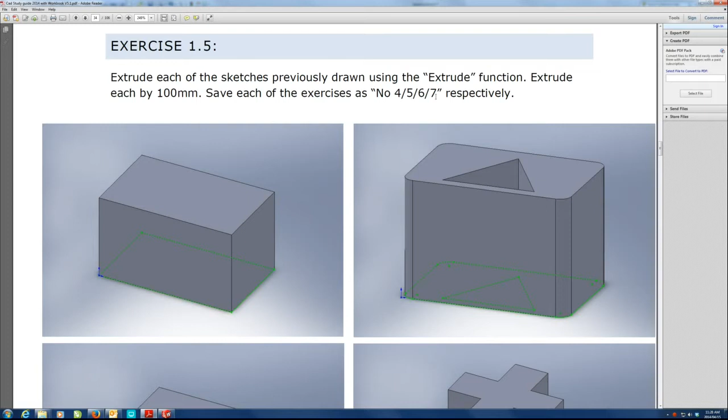In the previous video, what we did is we drew these 4 sketches, just the sketches. What we want to do now is change these sketches into 3D.

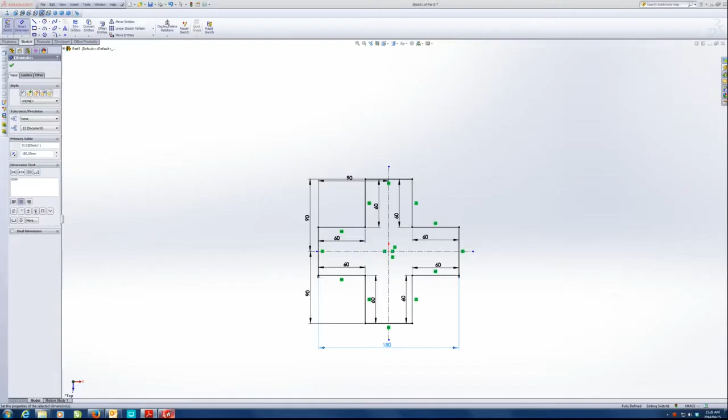Just for revision's sake, I'm going to draw this one from scratch again. We know that the sketch at the bottom was 104 by 170, so let's draw that again. I don't need to save this.

File, new part. It was on the top plane, sketch, and I drew the rectangle starting on the origin like this, giving it a dimension between this line and that line of 104, and between this line and this line of 170.

There's my square. Now it is fully defined - we have to check that it's fully defined and all my lines are black. Now we want to make this into a 3D object.

Under features, we go to extruded boss/base over there, and we can now change this from a 2-dimensional object into a 3D object.

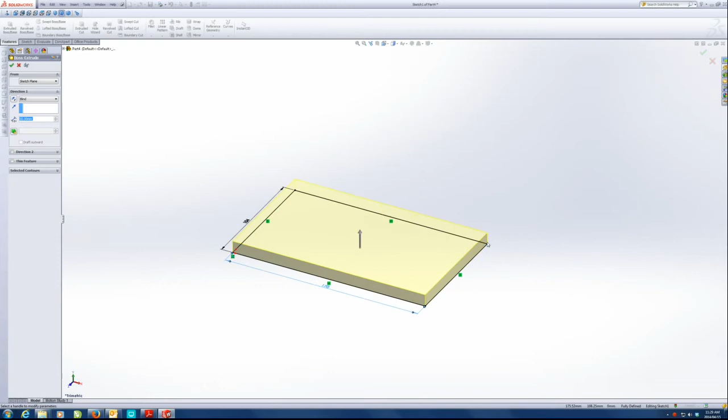There's one of 2 ways we can do this. You can either click on this handle over here, the grab handle, and make it 100 - you can see the little green number over there gets us to 100. This also allows us to change the direction up or down by clicking and dragging on that handle.

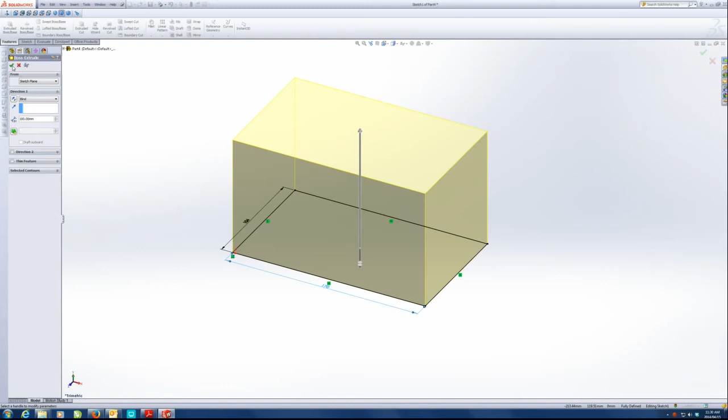The other option is to use the property manager on the left hand side. We know this must be 100, so we simply type 100 in there and press enter, and over here you can change the direction if you need to. In this case I'm happy with it going up. Now we click the tick, and there we have our block.

For exercise 1, now you're going to do the same. You're not going to redraw each of these sketches unless you didn't save them - if you didn't save them, you'll have to just redraw the sketches and extrude them. Save each of these individually - save them, you're going to need them a bit later.

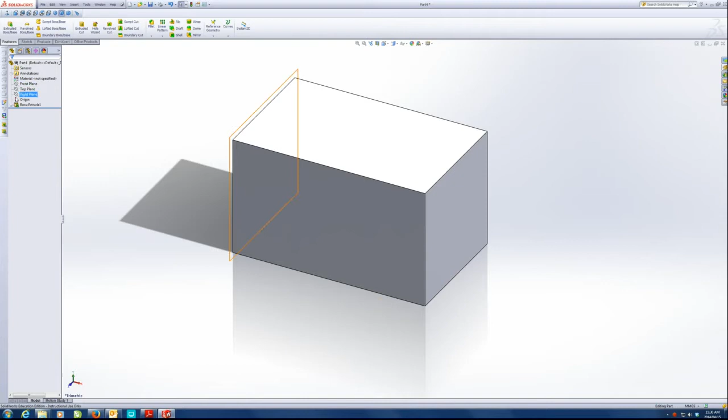By the way, this blue thing over there is the origin in each case. If you want to check where your origin is, we can just click on origin and you can see there it is in the corner - it lights up blue. Alright, let's go on with the next exercise.

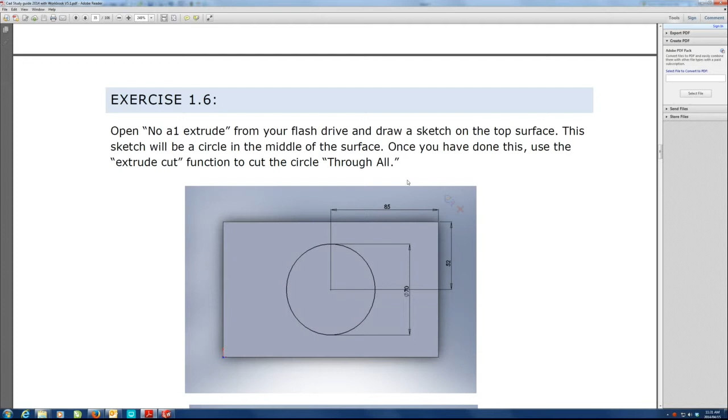The next exercise says: open number 1 extrude from your flash drive and draw a sketch on the top surface. This sketch will be a circle in the middle of the surface. Once you have done this, use the extrude cut function to cut the circle through all.

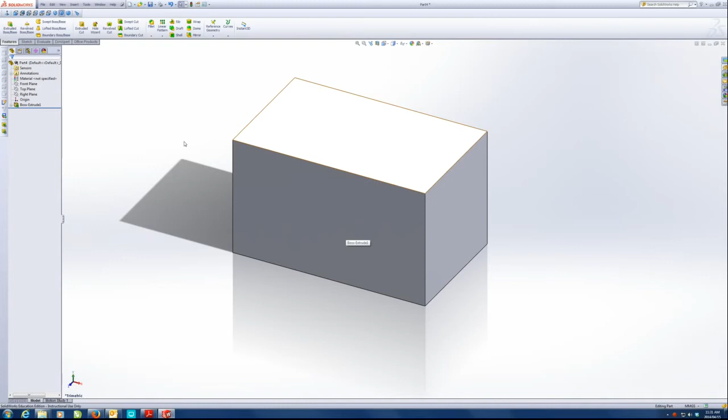What we're going to do here is draw that circle. In the past we selected a plane to draw on - we said we want to draw on the top plane and set up our sketch accordingly. But now we have a problem because there is no plane where we need to draw. The right plane is over there, top plane is at the bottom, and the front plane is ironically at the front. We want to draw on there.

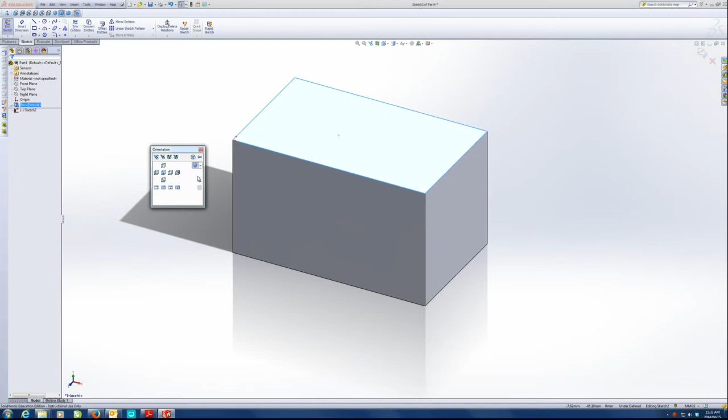So what we do is select the surface that we want to draw on and then click on sketch. Now we can draw at an angle, but it's going to be difficult to place things in the middle, so we want to view that surface directly from the top. We click on normal to, found over there in your views, or you can press spacebar and click normal to. Either way it's the same thing.

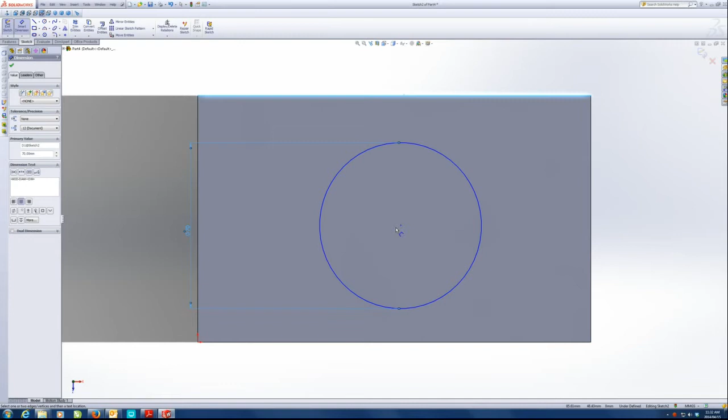Now we're going to draw a circle like this. The dimensions are 70, 52, and 85. Make the diameter of the circle 70, from this edge to this point is 52, and from this edge to that point is 85.

Now my circle is fully defined, so we can now cut it. I'm going to put this into isometric mode so you can see what's going on. We go to features, extrude cut, and select this to through all.

Now it's very important that you consider what's going on here, so let me first explain the difference. If we say blind, we can specify a depth that this hole is going to cut into this block. But in this case, we actually want it to go through all, so that it always goes through all.

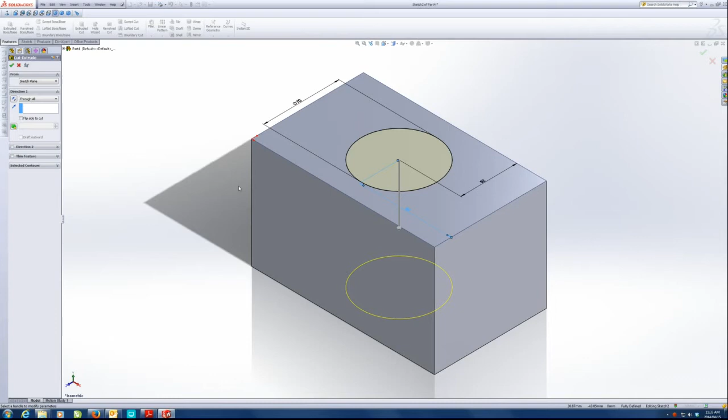This refers to something called design intent. When you're busy designing something, you need to think about the design intent: do we always want this circle to go all the way through, no matter what happens to this block? Let me show you what happens. If I go blind and make this 100, which means it does go all the way through, and I apply this, we can see this hole goes all the way through this block.

By the way, you can rotate your object on screen by clicking and holding the middle mouse button, then dragging your mouse, and that will change your view.

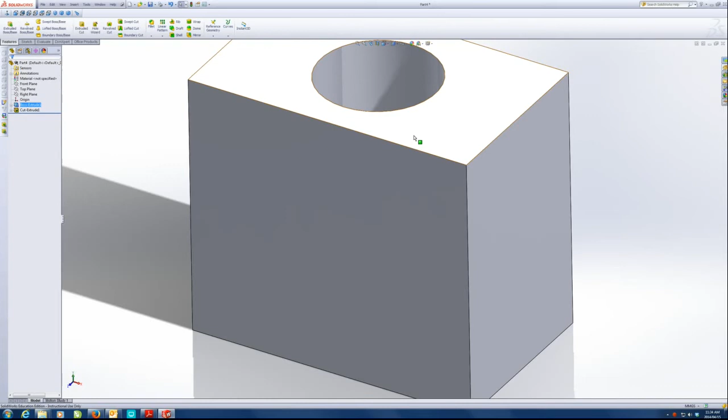Now say we decided that the height of this block wasn't enough and we needed to edit it. So we edit this and make it 150. Now what you'll find is this hole no longer goes all the way through. If we do a section view, you can see this circle does not go all the way through anymore — it only goes down to here, because we didn't select the through-all option.

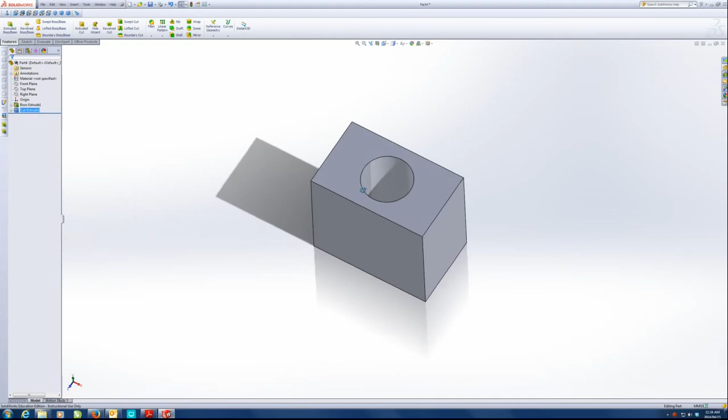Through all means that no matter what the size of this block is, this hole will always go through all. So it's not a problem, we can just come back here and change it. We right click on the cut extrude, edit feature, change this to through all, and apply. Now we have a hole that goes through all, no matter the size of the block.

For the next problem, you're going to have to round off the corners of this block. Let's have a look over here. So please save that on your flash drives. For this, we want to round off all these corners.

In the past, we used this function, the sketch fillet function. But now we're not doing a sketch fillet because we're not working in sketch mode anymore — we're working on a 3D object. So instead we use the fillet tool, found under Features.

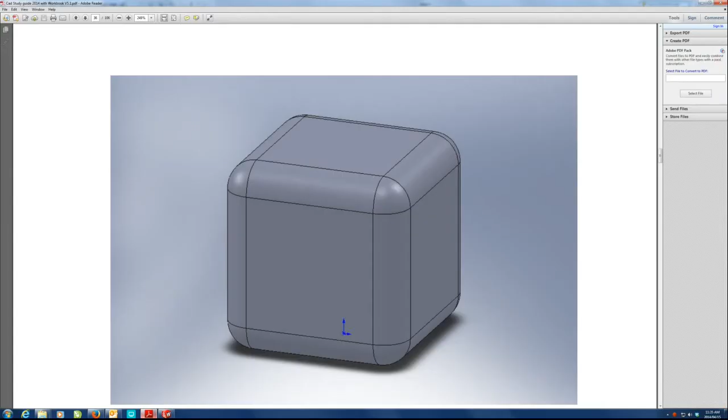There are 4 different types of fillets you can do — we'll get to them later. For now, we're just going to use the constant radius fillet. Over here we want it to be 10 millimeters — actually, in the example it's 25, let's check... okay, 20 millimeter fillet, but I was going to use 10. Oh, why not, let's use 20. So I changed this to 20.

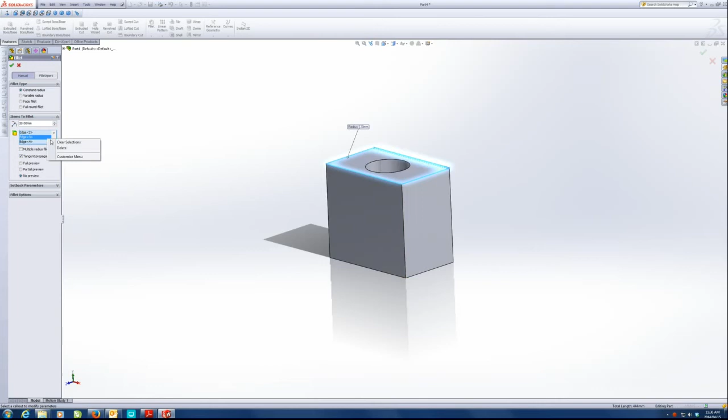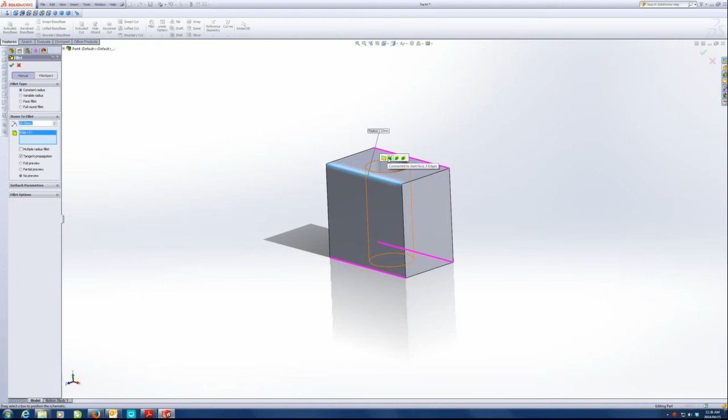Then we click in this box and select the edges we want to fillet — this edge, this edge, and this edge. It's quite laborious selecting all these lines, so instead we select the first edge and a window pops up with different options. By dragging the mouse over this, the computer can automatically select the edges. We want to fillet everything except the circle edge at the top, so we check which option is the one we need — not that one, since we're not filleting the circle, only the edges. So we click on that one: internal to feature.

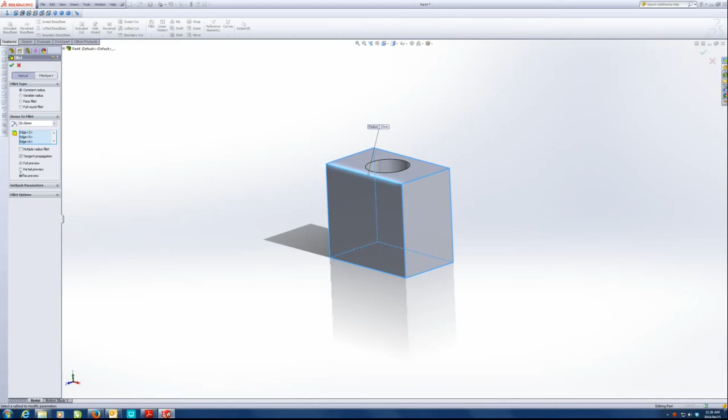If you want to see a preview, you can click full preview, which shows the preview in yellow. Otherwise no preview, or partial preview, which does the same thing. We click the tick to apply, and there we go — all our corners are rounded.

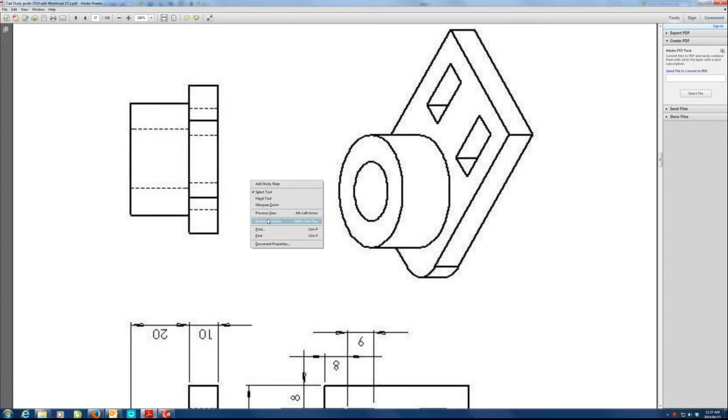So let's look at the next exercise. The next exercise is for us to draw this sketch. Let's quickly rotate this drawing so we can see it nicely. We need to recreate the sketch.

Now for this one, the position of the origin doesn't matter too much. The most important thing is that we split this up into steps, into pieces. So we're going to start by drawing this bottom piece and then adding the top piece on — I'm going to show you why. So we're going to start a new part.

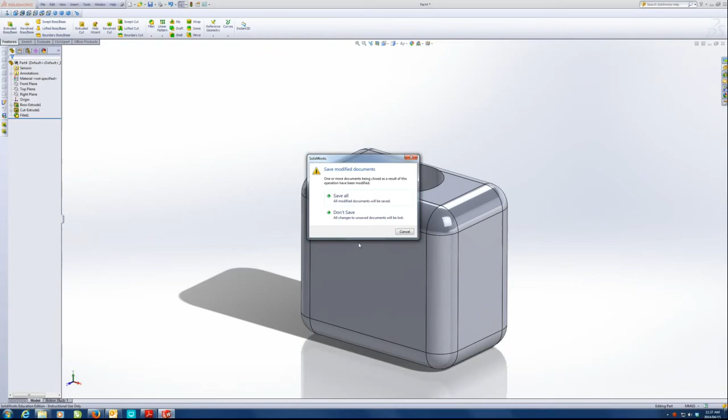Again, we're going to start on the top plane and say sketch. So I've decided I'm going to start on the top view — this is the top view, elevation over here — and we're going to draw this profile on the top view. I'm going to start with my origin in the corner and begin by drawing a square, 75 by 50.

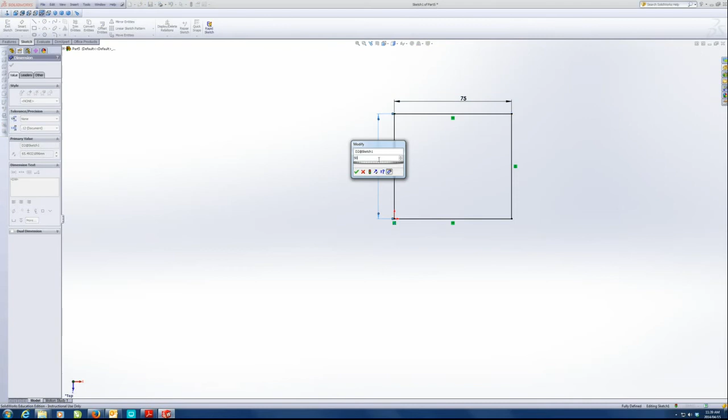Now I'm going to draw the rest of the features — these two squares. I'm not going to fully define this now, just because I want to illustrate the point, but yours will have to be fully defined.

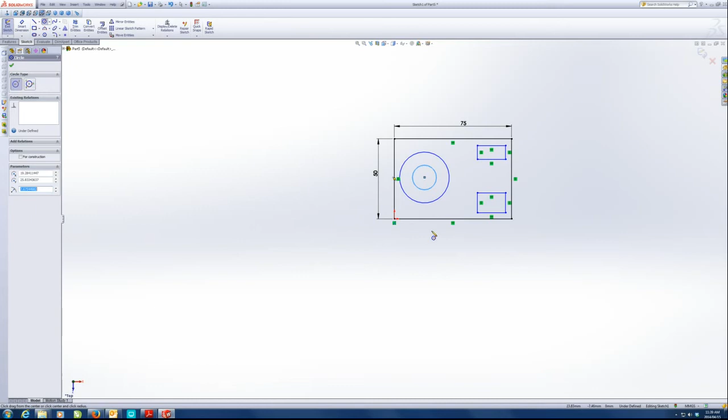Alright, so say now I'm done with this whole sketch. I've drawn this whole thing. I didn't put the fillets in, just to save a bit of time for now. I'm done. This is all fully defined, and I now want to extrude this.

You'll notice that by default, this does not extrude. The reason is because we've got 5 different profiles we could choose from. We could choose that as a profile, this as a profile, this, or this. The thing is with SolidWorks, with a normal boss extrude function, you can't extrude things to different heights. So if these objects are different heights, like they are in here, we cannot extrude them all at the same time.

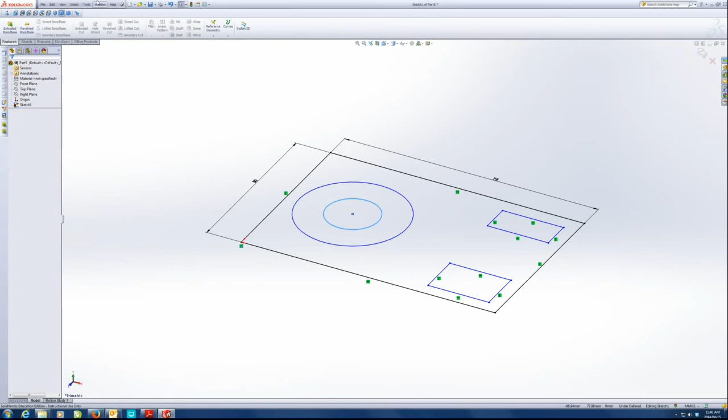So we need to split this problem up. We want to extrude this base first, because this is all the same height, and then add that on top afterwards. So we split this up into steps. What I'm going to do is take the long way around, select all of it, and delete that.

I'm going to round off one of these corners. I just want to show you can do it either way - you can either use the sketch fillet tool over here, or use the fillet tool afterwards. The radius of these is 12, so I set it to be 12, and I select one corner.

I'm going to do the other corner with the fillet tool, but you can choose either one - either do both with the sketch fillet tool, or do both with the other fillet tool. So we click OK. I've got the corner.

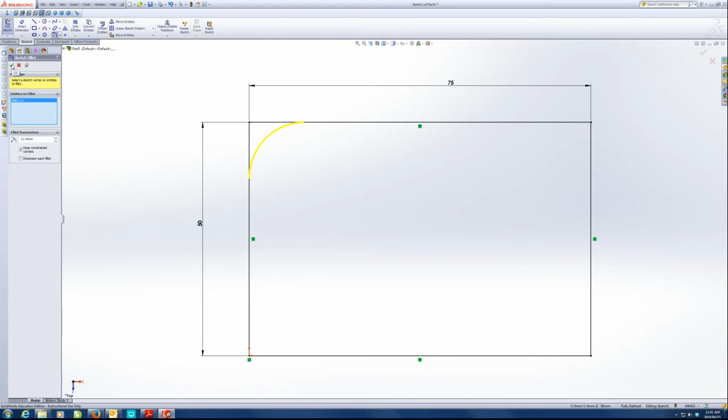Now I'm going to extrude this. Features, extrude. It needs to be extruded by 10 millimeters. There it is, 10, and we click the tick.

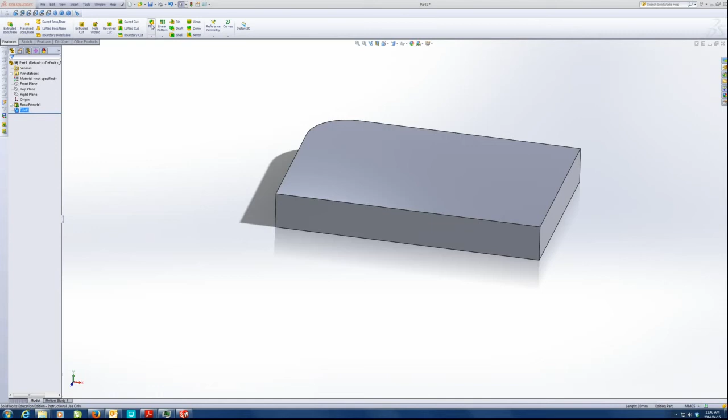Now just to show you, I can fillet this corner, make this 12, and fillet this corner as well. What I wanted to show you is the fillet tool - we can select the edge we want to round off, and we're happy with that, and click the tick. There is the same effect on both sides.

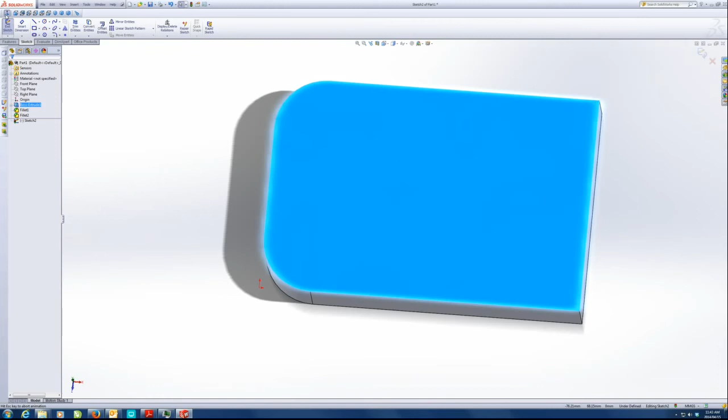Now, the next thing we're going to do is draw those two squares on the surface. Select the surface, click on sketch, Normal To, and draw our two squares. We fully define them by inserting the dimensions - they are 20 by 9 millimeters.

20 by 9, 20 by 9, and make that edge 8. From there to there is also 8, and from here to here is also 8.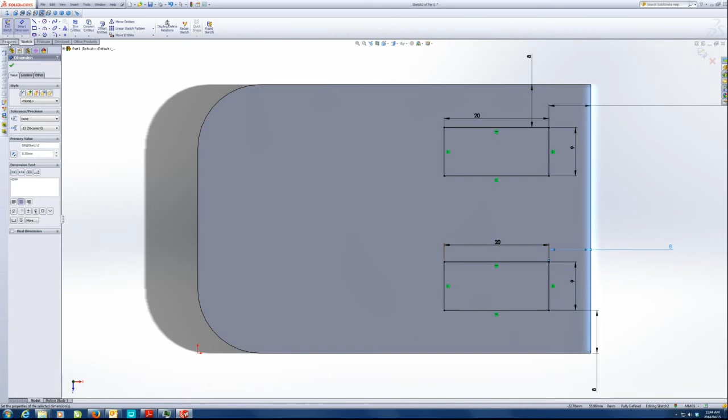Now we're going to cut extrude this, the same feature we used before. Features, extrude cut. I'm just going to put it in isometric so we can see nicely, and this is through all - you always want this to go through the whole thing. Click the tick, and there we are.

Now we want to draw those two circles on top here. We click on the surface, say sketch, normal to, and you can either draw a single circle, extrude it, and then cut the circle from the inside through, or you can draw a donut like what I'm going to do here, and we'll extrude that.

The dimensions for the circle over here are 38 by 20 - the outside one is 38, the inside one is 20. Let's check here on the study guide. From the edge it's 23, from that edge to there, and this is obviously in the middle of this block, which is 25 from that edge.

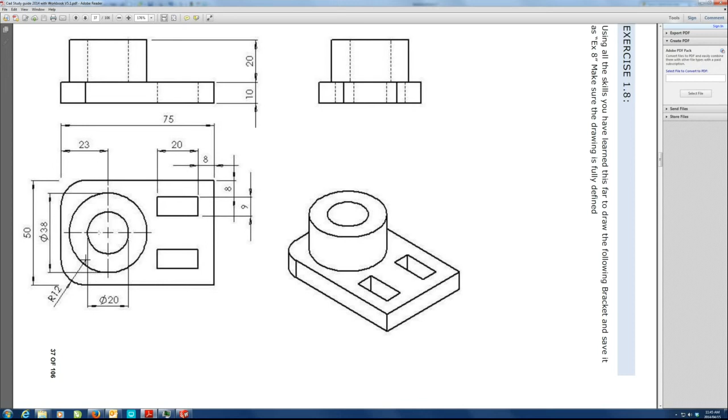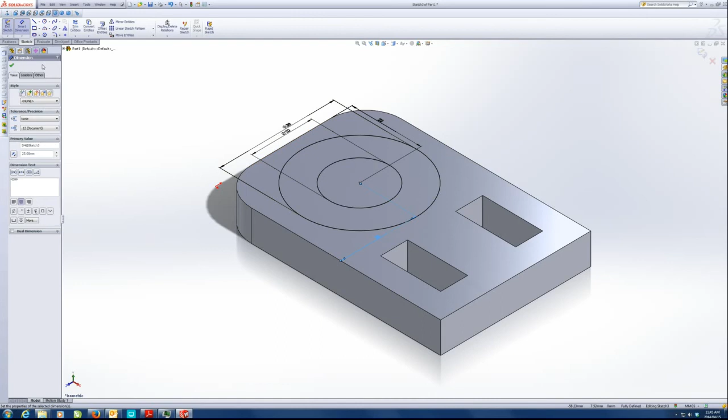So from this edge to there is 23, and from this edge to the center of the circle is 25. Fully defined, isometric, and we can extrude this. Features, extrude - the height of that is 20 millimeters, and we click the tick.

There is the last exercise in Module 1. After this comes the Module 1 worksheet, and for the Module 1 worksheet there are answers that we need to have, which we have in the study guide for each of those problems.

Now, if you have a look on page 38, okay, we start with Module 1 worksheet. Now this is on its side so that we can see this properly. I'm going to draw this for you quickly because I want to show you how to check your answer according to the answers at the back.

So on page 98, let me just see if I can skip there. Okay, are the answers - oh right, okay, anyway, on page 98 are the answers. Now I'm going to draw this quickly.

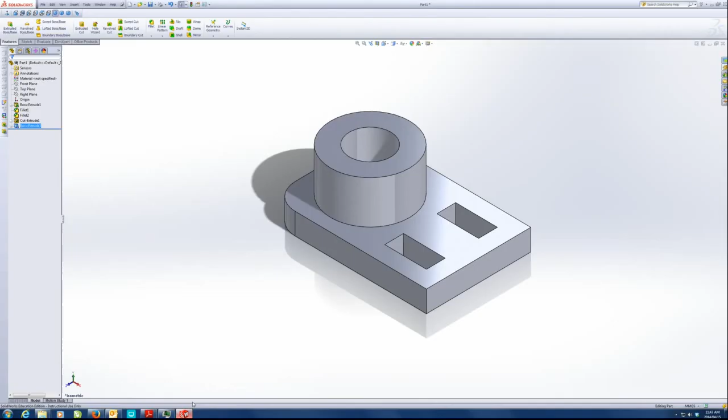With this one, you can select from which view you'd like to start. I'm going to start on the top view, looking down at this from the top, and I'm going to start by drawing this profile. You have to split this up into sections, into different steps, because you can't draw all of this in one go. So we're going to start on the top view. Please make sure you've saved this one as well.

So I'm going to start off by drawing that L. I'll just find it in my study guide over here, so we don't have to keep selecting different windows. Alright, I'm going to start by drawing this top L over there, because the origin is over here, in line with this. So let's get cracking. Top plane, sketch.

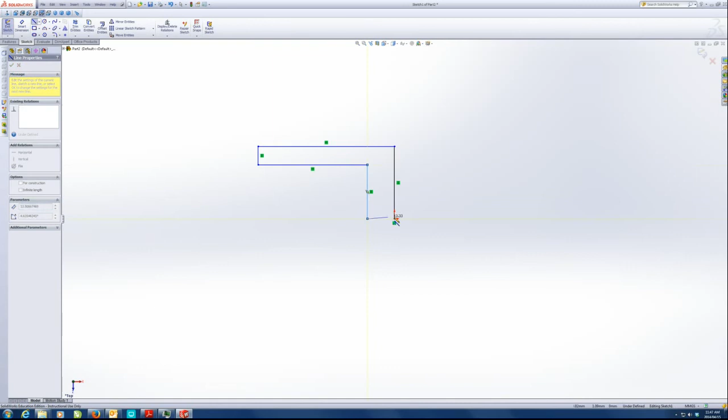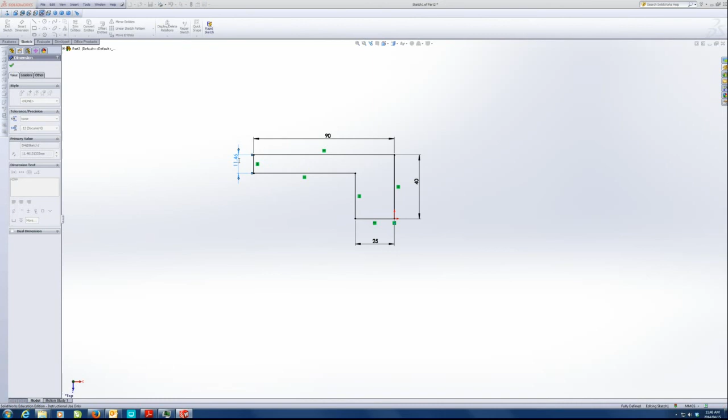We're going to start by drawing that L, using the line tool. You can use whatever tool you want, as long as you get to the answer. Now we insert dimensions to make it work: this is 90, this is 40, this is 25, and this thickness over there is 20. That's all we need to fully define our sketch.

Now we extrude it. I'm looking where my origin is here, and I'm happy with it in that corner. So now I'm going to extrude this by 60 millimeters. There it is, 60.

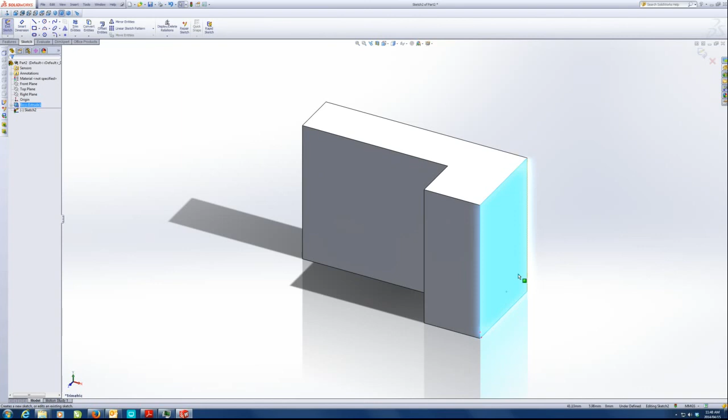Now I'm going to add that square on the side. I click on that surface, click sketch, and go normal to. Draw a square on the surface. I know the height of that square is 20, so from there to there is 20. I don't need another dimension because these lines have already linked to these edges.

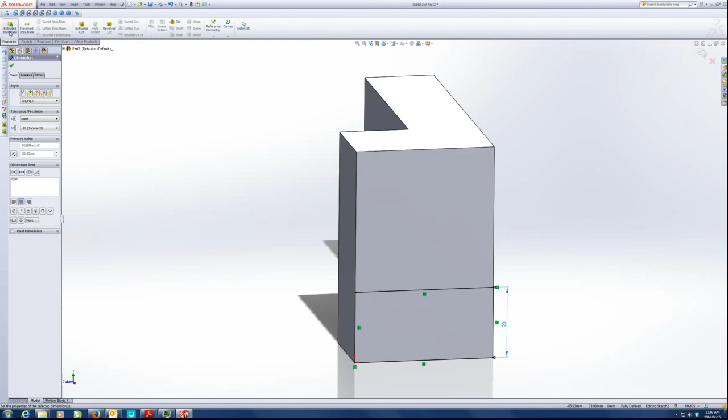I'm just going to rotate this a little bit. Features, extrude. We're going to make this 25. Now let me quickly check if my origin is still in the right place, because the origin has to be in the middle of that bottom section. So I come here, click on origin, and check. Haha, there it is, in the middle. You can see it glowing blue there.

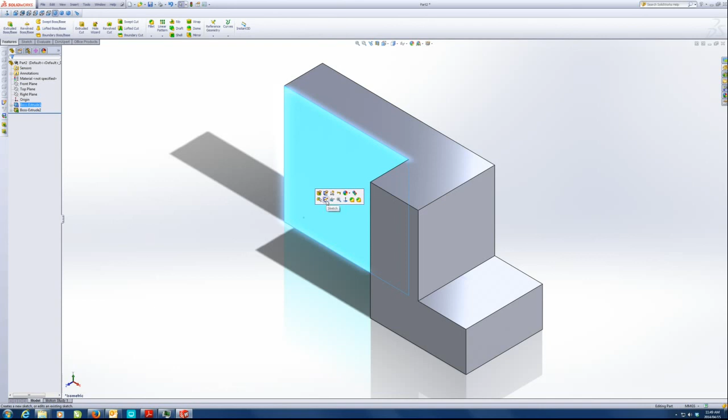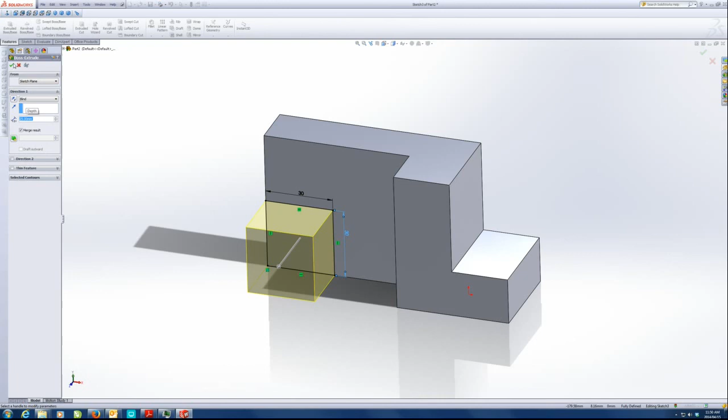Lastly, I need to insert a block on this face. So I click on this face, say sketch, normal to, and start the block in the corner like this, and give it its dimensions, which is 30 by 30. Now features, extrude, and this time this has to be extruded by 25. Ready is on 25. And there we have it.

Okay, there is drawing module 1, drawing number 1. Now, the one thing we need to know is if this drawing is correct, because of how I'm going to ask it in the test. If you were designing this block, you would be done now. Where the origin lies is not always relevant, but for this subject, it's very relevant that you put the origin where my origin is.

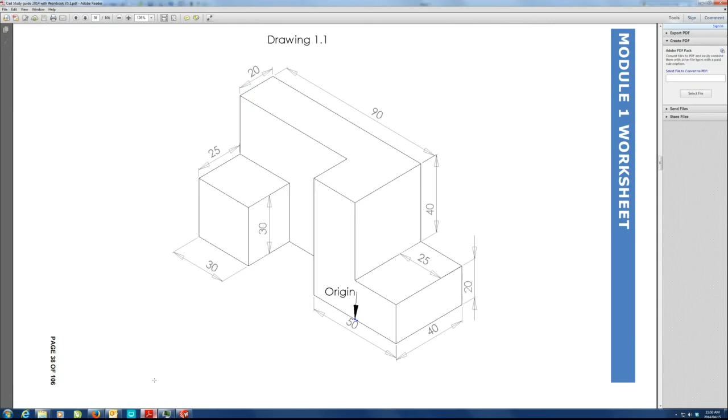So what we're going to do now is check the answer, which is on page 98. Except it's now lying on its side, so we'll have to rotate this back to the top. Right, module 1 worksheet answers, drawing 1.1: cast carbon steel, mass, volume, surface area, center of mass.

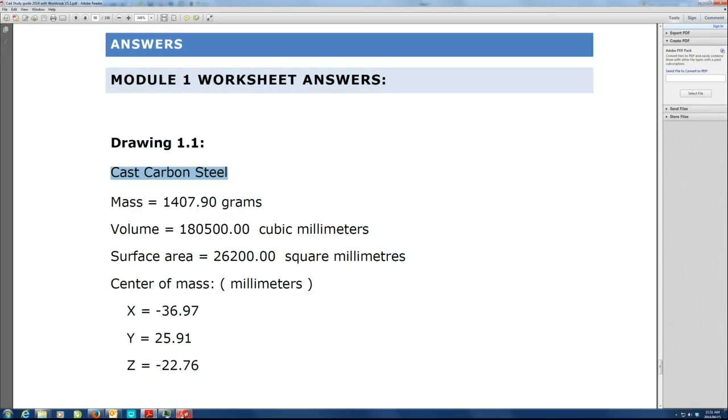This is the material that I want you to use to make this part out of. So if I go back to SolidWorks, in your feature tree, you'll see material not specified. If I right click on this and say edit material, it will open up this window, and there's a lot of different sections here. Each one of these is a folder. You can open and close it by pressing the plus or minus next to it.

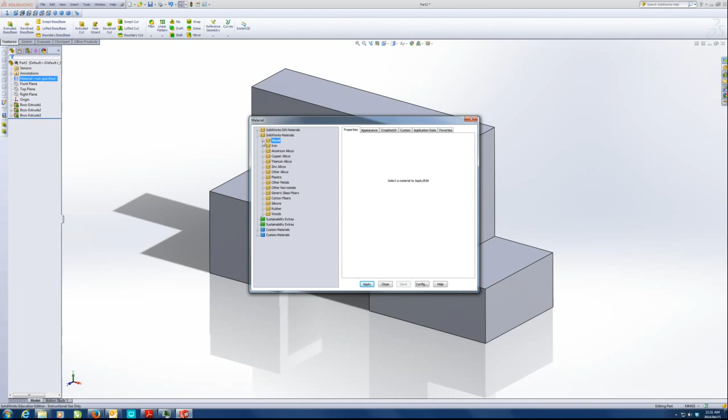Alright, so I said cast carbon steel. So we're going to go to steel and go to cast carbon steel. There it is, we click apply. You'll notice that this has changed to cast carbon steel, and close. You'll also notice that the color of your sketch might change a little bit. You'll see mine has changed - it's got these lovely dimples on it.

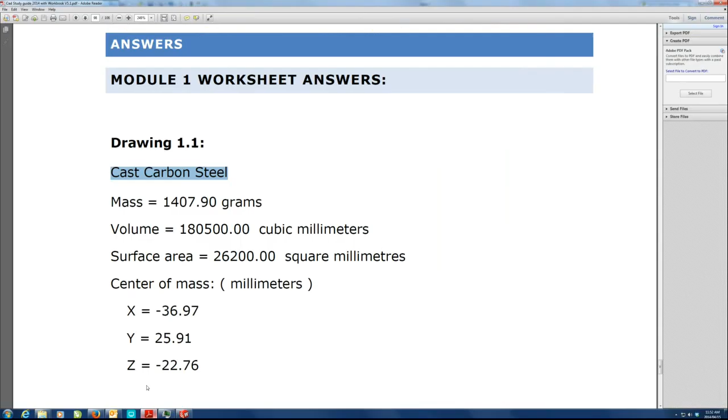Now we want to check if this is according to my answer. So we go over here under the Evaluate tab, click on Evaluate, click on Mass Properties, and check - do these values correspond with my values over here? Let's have a look: Mass 1407.90, 1407.90. Volume is the same, surface area is the same, X same, Y same, and Z is the same. That means that this drawing is perfect.

You have to be within 5% tolerance of the mass and volume, and within 5 millimeters of the center of mass. If you are not within that tolerance, it doesn't get marked as correct. So that is all you need to do for module 1's worksheet, so that you can check if your answers are correct.